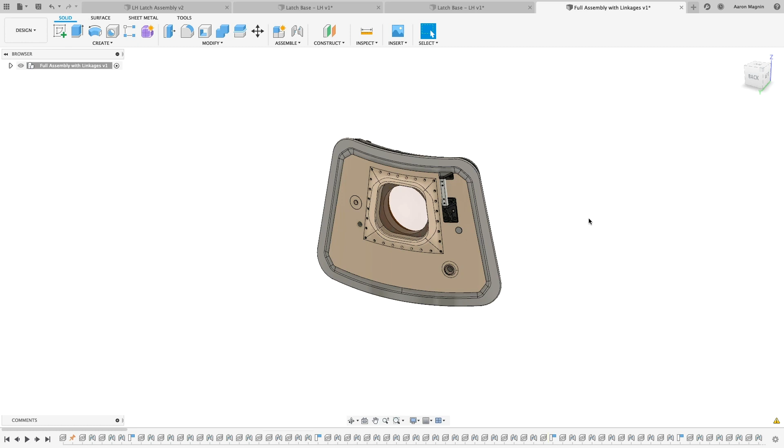As you'll notice, we'll be using parts of this amazing design from Project Egress, which is a recreation of the main crew hatch from Columbia, the command module flown on the historic Apollo 11 lunar landing mission. So cool. Anyway, right off the bat, we can't go anywhere without addressing the elephant in the room for some of you. That is the toolbar UI.

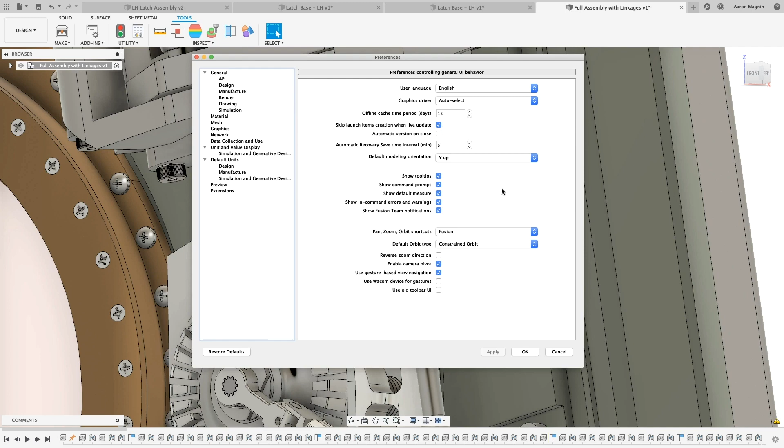If you hadn't turned on the preview, you'll now find it's become the default. Hopefully that soft release made the transition easier. The new UI offers improved tool organization, discoverability, and most importantly, it sets Fusion 360 up to be more scalable as more functionality is introduced. If you need to switch back to the old toolbar, you can, but that option will only be available for a limited period of time.

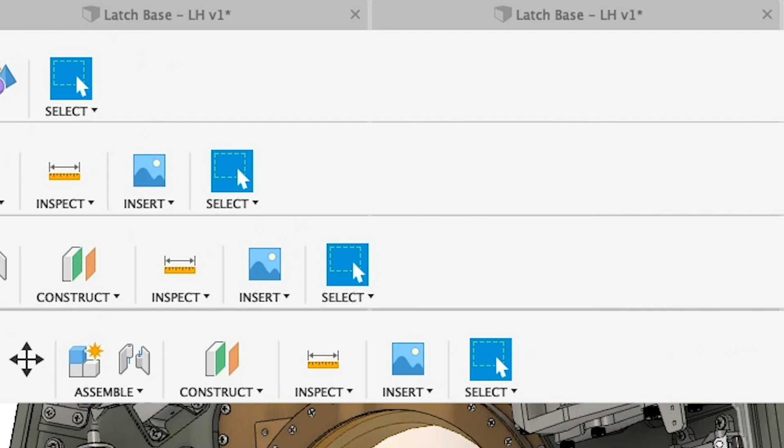In addition to that change, everyone will experience the new icons for the first time. These icons sport a cleaner look, adapt better to large format screens, and are part of a company-wide initiative. This initiative intends to gain more consistency across all Autodesk products, from Fusion 360 to Inventor to AutoCAD, and so on.

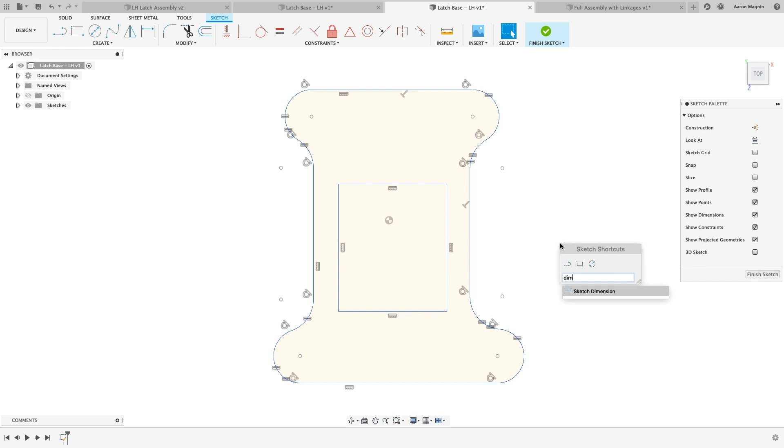The next change is something I'm personally thrilled about, and its value becomes immediately clear. How many times have you roughed out the shape of a design in a sketch, only to have the first dimension blow all that hard work to bits because that sketch, although visually close, was a magnitude off in terms of size? Well, now you have an option to scale when you add that first dimension to a sketch. Enabling this will ensure all other sketch entities are scaled proportionately. This will maintain your design intent and help avoid those difficult situations of the past.

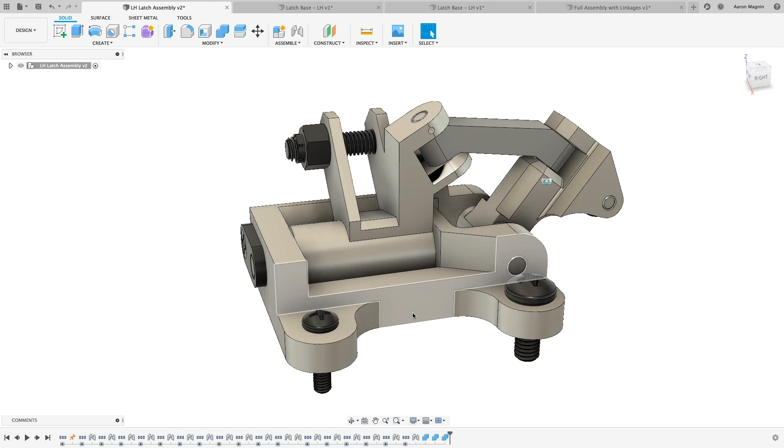In addition to that, editing joints just got a whole lot better. As you can see from this interference detection, it appears I put two pins on top of each other. In the past, when you went to edit a joint to change its component reference and put it in the right place, well, you couldn't, so you'd have to delete and re-add a completely new joint.

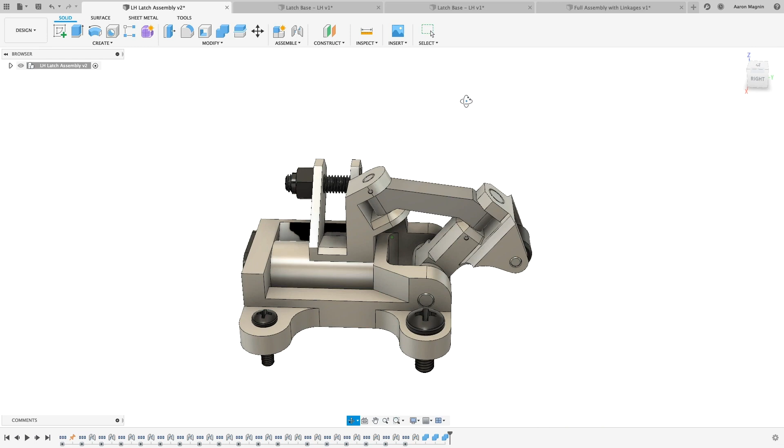As you can probably guess, that's not the case anymore. All you need to do is right-click to edit and select at will. When changing components, it'll even give you some nice feedback pertinent to the current selection. Next up, I'll send it over to Bryce for some amazing generative updates.

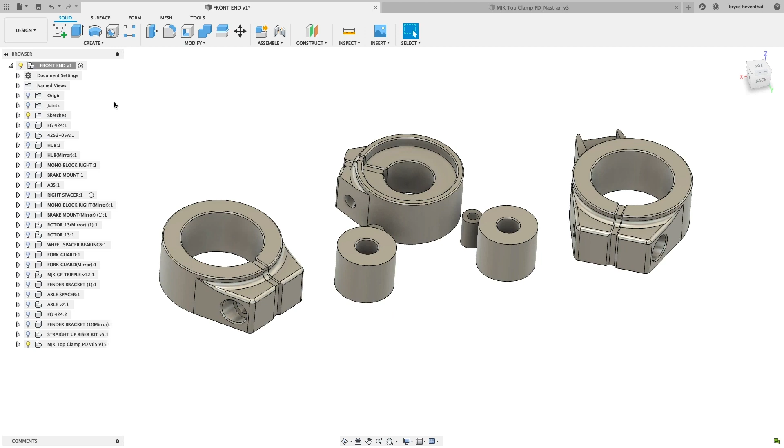Alright, I have some major enhancements coming to you in Generative Design. This one is currently a preview, so make sure to turn it on in your preferences by going to your name in the top right. If you've been watching our past updates, we've been quickly adding to our manufacturing constraints, which produce geometry that can be manufactured by different manufacturing methods. One of our great Fusion 360 customers, MJK Performance, makes bespoke motorcycle parts and wanted to explore how we could make this upper triple clamp.

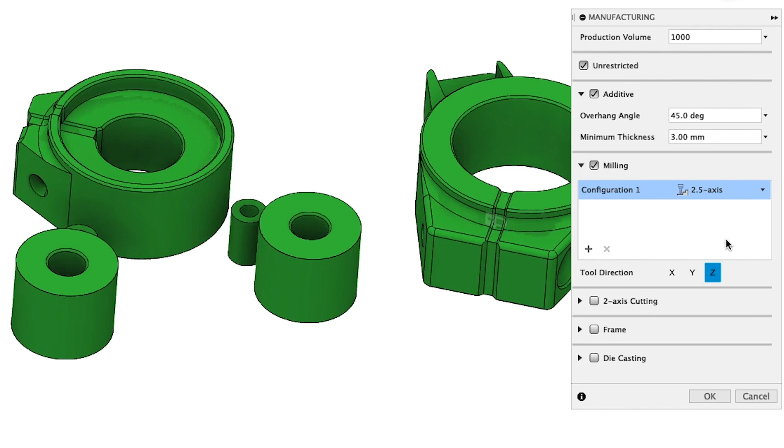Over the past year, we have added manufacturing constraints for additive manufacturing, 2-axis cutting, die casting, 3-axis, and 5-axis milling. But we didn't stop there. In this update, we have added a 2.5-axis milling constraint to help meet the right balance of performance gains with manufacturing time. Currently, with our first implementation, we will produce 3 different outcomes. In this case, since I selected the Z direction, it will produce one as if I was milling from the positive Z-axis, one from the negative Z-axis, and one from both.

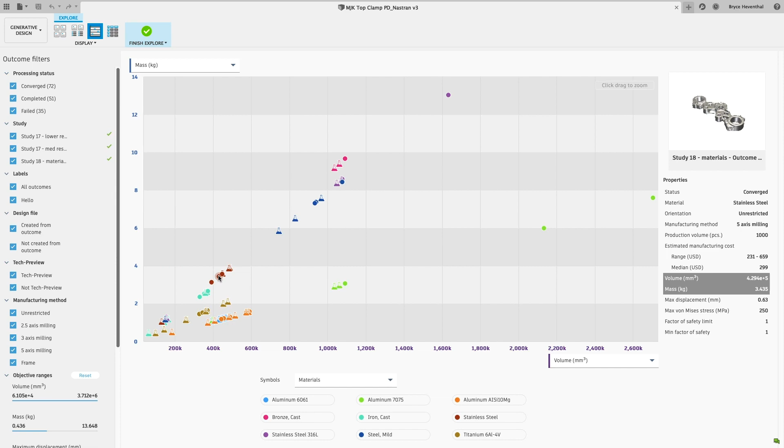We wanted to get this preview in your hands so you can get to testing out this awesome functionality. We will be quickly adding more parameters to this constraint over the next few updates to help define your manufacturing setup better. Once an outcome is selected, we have the option to turn it into an actual B-rep or solid body to build this design on further. Our customer MJK Performance wanted to ensure the generative results match their customer's style, so they are able to edit the geometry parametrically and add details consistent with their brand.

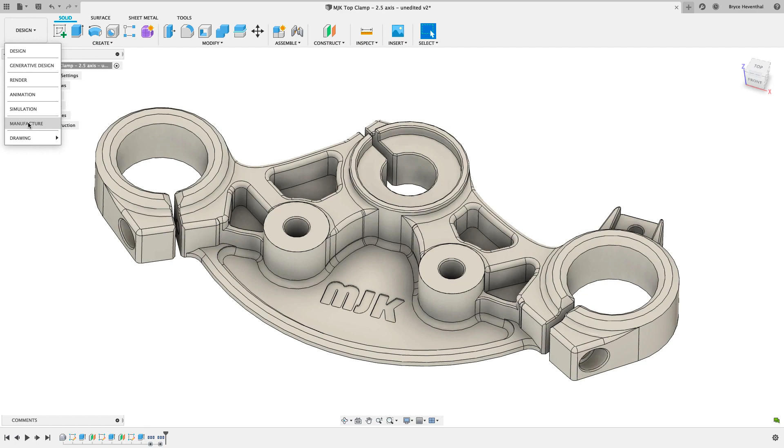But remember, Fusion 360 isn't just about generative design. Fusion 360 connects the product development process all the way to manufacturing. So take your results to the manufacturing workspace and start throwing some toolpaths on your new part.